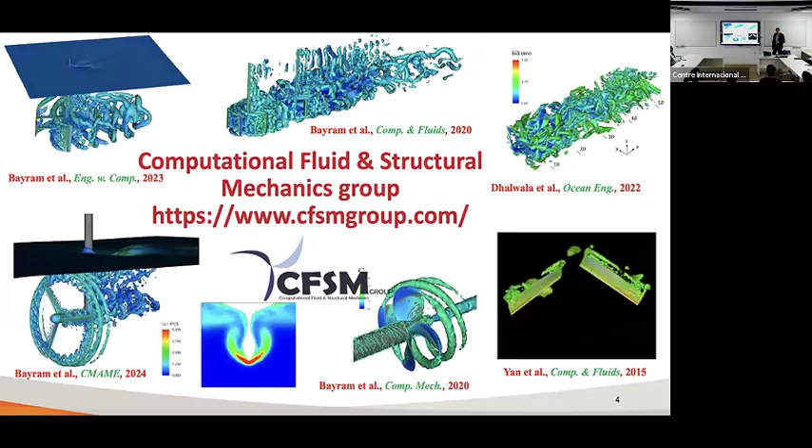And so today I will talk about the left part of the slides, which is kind of highlighted over here. The videos, because there are so many of them, will be a little jaggy, but this is almost exclusively the work related to marine renewable energy systems. So the hydrokinetic turbines, vertical axis, horizontal axis, all the way from single-phase to multi-phase cavitating flow. So I will show you some very recent work we've done in that respect, and highlight a few challenges and the ongoing perspective directions. Okay.

A very quick motivation about the work we do. It's both from the civil and the military application. On the civil spectrum, the several hydrokinetic concepts. I probably should have included one from Spain. I believe it's a very active topic because you're surrounded by the water, so it would make more sense. And then the sports applications, like the flying hydrofoils, which have a very cool multiphase problem where it's not just the cavitation, you also have the ventilation, which is the entering air, which is non-condensable fluids, etc.

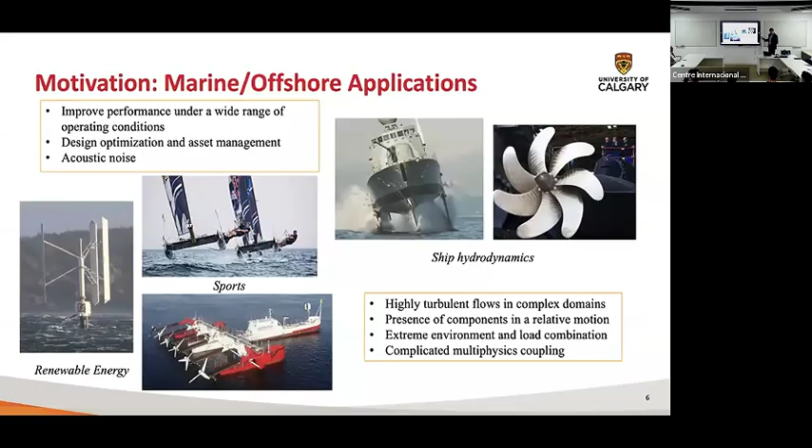And then all the way on the military spectrum, kind of the same things, the flying hydrofoil, but of different types of vehicles, and then the ship propellers and specifically cavitation. We are currently looking only from the fluid mechanics point of view, and you can see all of the challenges just doing fluid mechanics itself: high Reynolds number, multi-physics coupling, computational efficiency, etc. And as you start adding the structural part, for example, if you want to look at the explosion or collapse of your cavity pockets, which will be almost like a blast on your propellers that will completely destroy the surface, that brings another layer of fidelity, and that's something we are looking at right now, but I'm not going to show any of those in this talk.

So there will be lots of equations, and I don't want to apologize because you're all very smart people. So let's talk about what is behind all of these colorful pictures. Otherwise, they're just colorful pictures. So it's a very general form. First of all, as Eugenia mentioned, I am coming from the finite element for fluids community. For this group, I would not call myself a unique person because many of you are working in that realm. So we start with the strong form of the governing equations.

So your classical conservation of linear momentum, conservation of mass, and then you have the transport equation to govern your vapor or volume fraction. You decide which one you want to solve for. And then you also have the free surface, and for the free surface we're using the level set function. So this psi represents the level set. For the multiphase, it's the homogeneous mixture model, the classical equation in terms of the Heaviside function, so nothing exotic.

I will also mention the pros and cons of this homogeneous mixture model approach. Pros, it's very simple and straightforward. Cons, it relies heavily on empiricism, because as you will see in the equations, you need to have the proper rate for the formation of one of the phases. So you need to somehow assume a specific cavitation number, which I don't want to do, because in reality, give me a system and I model it, and it will give me whatever it should. So this is where we've done this. It works. But what I'm looking for right now is something like Cahn-Hilliard type equations, where you can actually solve for the cavitation without assuming any empiricism. We're inspired by the work Hector Gomez is doing at Purdue, where they implemented that. So that's the future steps.

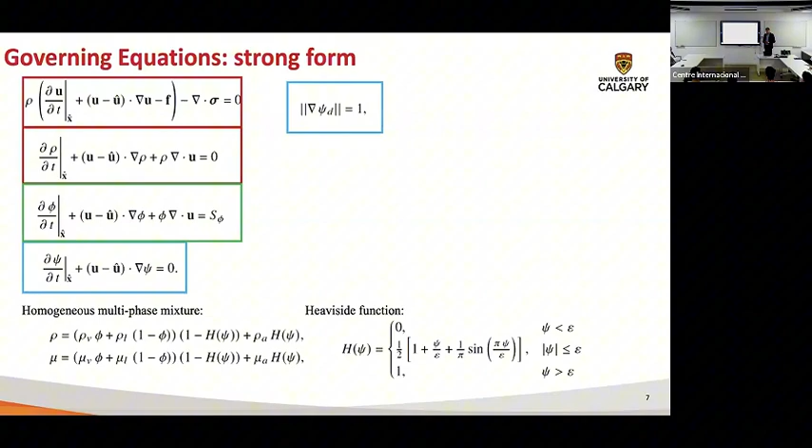And of course, you need to have this Eikonal equation to make sure that you're solving for these distance functions. Then we try to massage the equations a little bit to make them more programmable. So we put all of the unknowns on the right side for the continuity equations. We rearrange the terms in the advection-diffusion equations. And now you see on the right-hand side of this transport equation, you have this S phi. That's your source term, which corresponds to the specific cavitation model that you are using. And I will explain what we do.

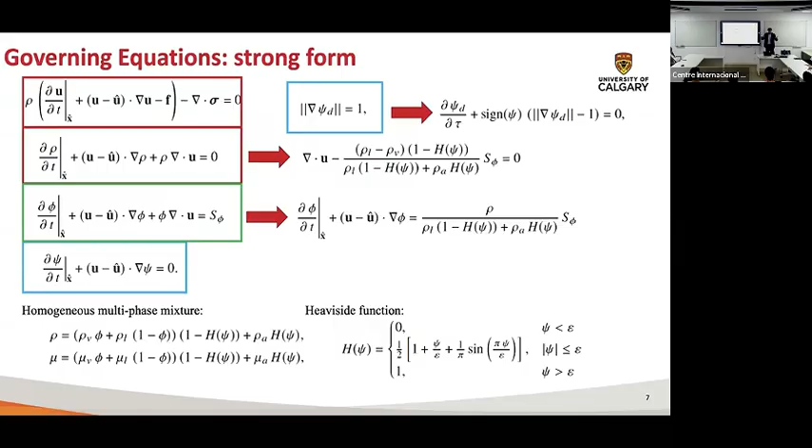The way we solve the Eikonal equation is we formulated it in the advective form using this pseudo time step approach. That's something that Yuri Bazilevs and Ido Akkerman did many years ago, and many researchers first introduced that approach, and we successfully adopted it.

Now, for the cavitation. As I mentioned, we're using this transport equation-based cavitation model. If you are in the area, you know that there are two most commonly used ones. One is called the Merkle model. This is the model where you express your source term as some kind of linearity which is proportional to your local static pressure.

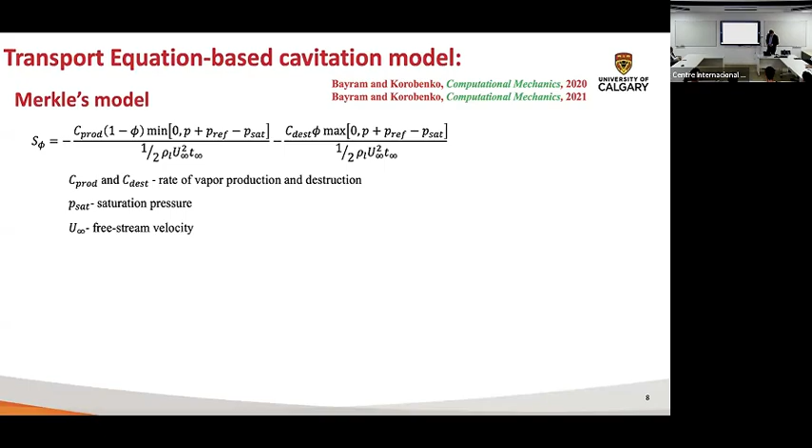And again, this is the empiricism that I'm talking about. You have this rate of production, rate of destruction, which is then related to the cavitation number. And then the second one is the Zwart model, which is kind of a simplification of your Rayleigh-Plesset equation. So it's based on single bubble dynamics, even though in all of these homogeneous mixture models we are not resolving individual bubbles. You're modeling the field.

You may think the most appropriate application would be cloud cavitation, because even in cavitation there are different regimes: individual bubble, cloud cavitation, tip cavitation, etc. So some of the models might work best for one or another. And this is the expression. Again, we did not invent this model. We just successfully adopted it in our finite element formulation.

The very challenging task was to actually linearize this, because you have a square root, so how do you do that? We did some approximation. It's in the paper, so if you're interested, please go ahead. And we performed a sensitivity test of different linearization strategies, because if you linearize everything, you have all of these fancy Euler-Jacobian matrices, but some of them are actually not important. You can skip them.

For example, your transport equation depends on the pressure. Can you ignore that? You can, but that will affect your rate of convergence, maybe affecting stability. So we did a very meticulous test and showed which linearization schemes work best in that respect.

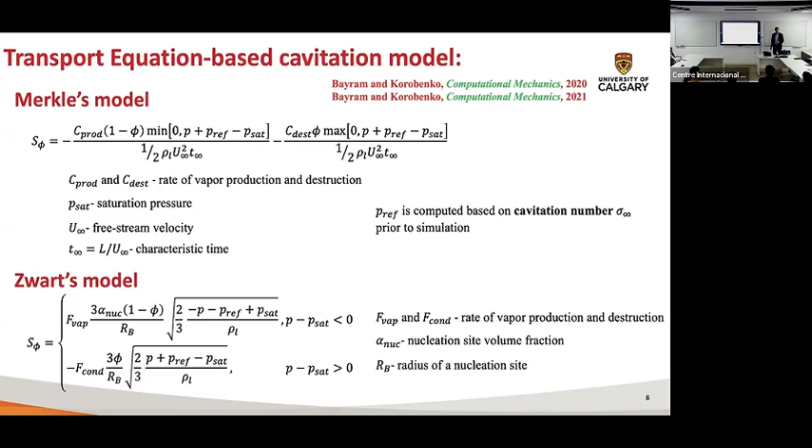And again, this is the level of empiricism, because you need to know this rate of vapor production and destruction. You need to assume a specific nuclei diameter and radius, etc. It works, but I don't like that level of empiricism. And this is your reference pressure. You need to know the cavitation number. The lower the cavitation number, the higher the cavitation you have. So that's the physics of cavitation at the level I want to present it here.

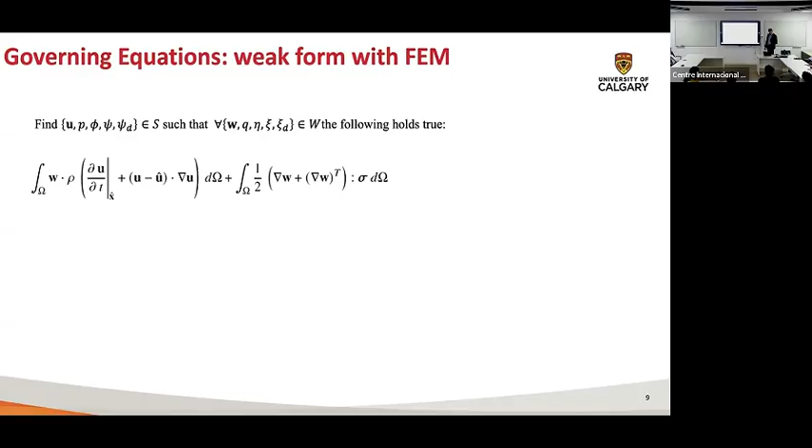Good. So hopefully you still remember that set of governing equations, the strong form, your partial differential equations. Now let's formulate the weak form of the problem using variational calculus. It's nothing but the integral form of the equation. This is your classical Galerkin, corresponding to the momentum, the continuity, the transport equation for the vapor volume fraction, and then your body term corresponding to the momentum equation. Then the same integral form for the level set, and the same weak form for the distance functions. So this is your standard classical Galerkin finite element approach.

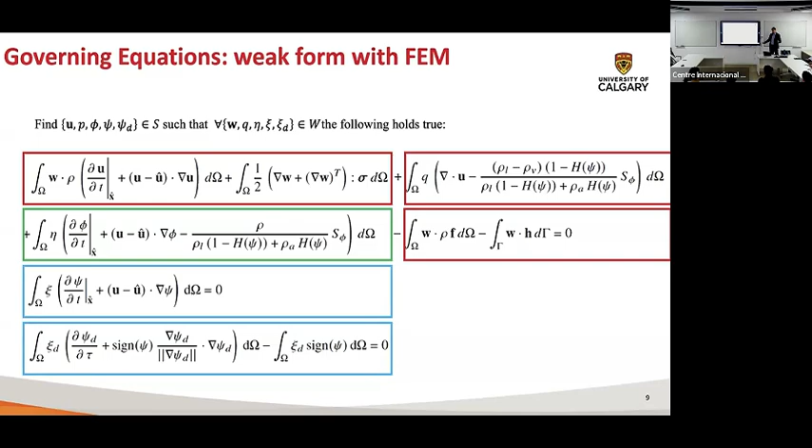Good, but unstable. In the presence of source terms, in advection-dominated regimes, it falls apart. So you need to do something smarter. This is where we work with the stabilized finite element method, more specifically the variational multiscale formulation. I will give you a very quick intro to the VMS method, which I assume many of you are familiar with.

How many of you heard about VMS or are using VMS? How many of you know LES? How many of you are structural mechanics people? How many of you heard about turbulence? Excellent. Let's start with that.

Turbulence. You can describe turbulence using this energy cascade plot. You plot the energy versus the wave number. Larger eddies, smaller frequency, more energy-containing scales, and as these vortices propagate, they break apart. This is your energy cascade. Energy is transferred from the large scales to the small, and they dissipate at the Kolmogorov scales. This is your viscous dissipation regime.

Now, a very quick intro to turbulence modeling. There are three main turbulence modeling approaches. One is called RANS, or actually URANS, where you simply model everything. So you are not resolving at all. In URANS, you're only resolving your energetic large scales.

Then the second one is LES, where you assume that your cutoff length is somewhere in the inertial regime, right? So this is the famous -5/3 slope. And then you have DNS, where you're resolving everything, meaning that your mesh is so fine that you're capturing everything. So VMS is an LES-like approach, which means your mesh should be in this inertial regime. So that's the starting point.

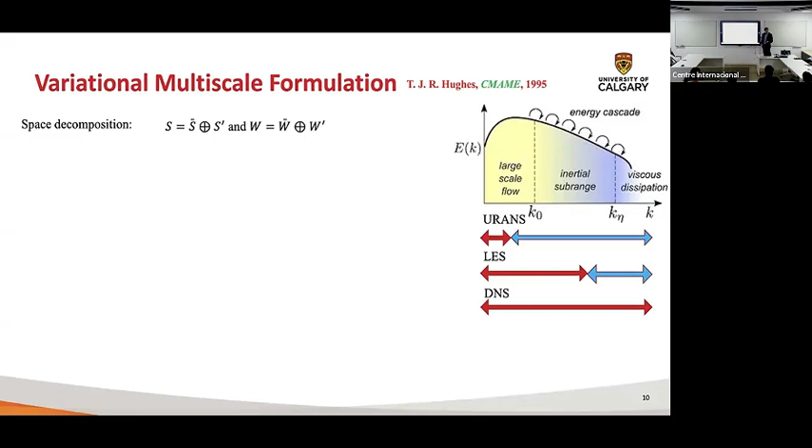And then, classical to LES, you start with this scale separation into the coarse scale, something that you are capturing with your mesh, and the small scale, something that you are modeling. So now you introduce that decomposition into your test function, and you throw in solution variables and put it back into your Galerkin form. What you end up with is two sets of equations, a coarse scale and a fine scale. To close the system, I simply need to solve the fine scale equation for my U prime and throw it back. Can I? Of course I cannot, because it's as difficult as solving the original problem.

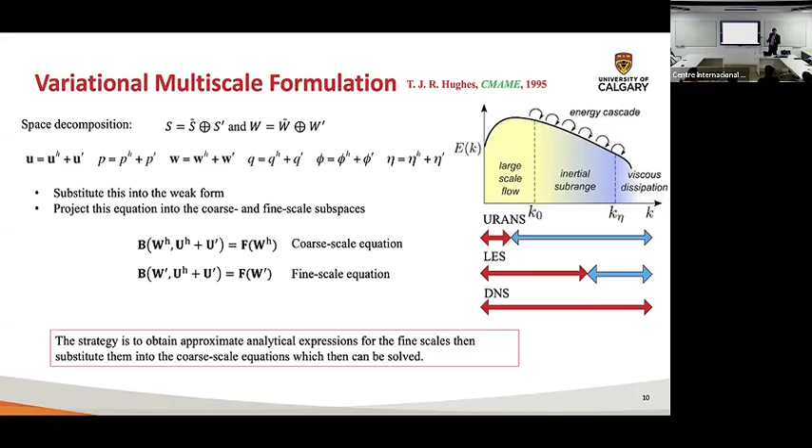So this is where the beautiful mathematics comes into place. We can formulate these problems in terms of Green's functions, and then we solve for the approximate Green's function. Lots of work done by colleagues here, Ramon as well, Antonio, and many people. What I will show is a simple form of that. I will show the fine scale equation in terms of this projection operator. I can rearrange my terms so that all of the large scales are on the right-hand side, and you will see that when I group them, they look like the residual of the large scale problem, for the momentum, for the continuity, for the advection diffusion equation.

And then I have this additional term, these functions, which enforce that my right-hand side is still infinite dimensional, because your fine scale subspace is infinite dimensional. And so then you actually do the truncation. You say, okay, I have my expansion, I truncate all of the higher terms, I keep only the first one. Is it good? Many people are still using just that one. So it's good enough, but I still want to look at what the impact of those higher order terms would be. And so you can formulate this approximate fine scale problem.

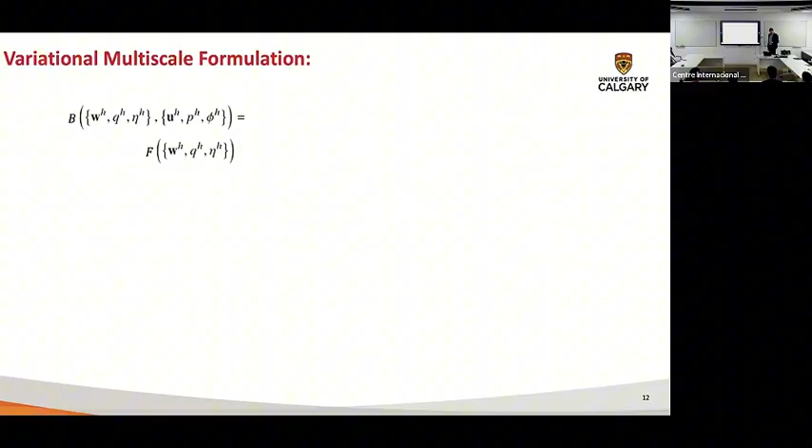So pretty much your small scale is simply proportional to the residuals of the large scale, and your proportionality factor is your stabilization parameter tau, which has this diagonal term, and it was designed to stabilize the formulation in the inertia dominated, advection dominated regime, or when your diffusion term dominates. Look at the work from Tom Hughes and colleagues on the origin of stabilized finite element methods if you want more insight. So now, with all of that explanation about the small scale, you can say I know turbulence, I know the basics of the stabilized finite element method.

So next year I will come and ask how many of you know turbulence and VMS. You should raise your hand, because I remember all of you.

Okay, so let's put all of the terms together and formulate our problem. As before, nothing happened to the Galerkin terms; they're still there. But now you have additional terms. What are those? When you introduce these decompositions, you have an interaction between your large scale and small scale. So you have terms which look like U prime U, U U prime, U prime U prime.

Okay, if you compare it to the classical turbulence modeling, they will look like your cross stress term, Leonard stress term, and the Reynolds-like stress term. I would like to add this Reynolds-like stress term because every time I talk to fluid mechanicians and I say this is the Reynolds stress term, they get hammered, okay, without explaining too much. So I like to add this line.

Okay, so what does it look like numerically? You have your classical streamline SUPG. So this is your cross stress term, U prime. You take the advective part, and you stabilize that one. Then you have this additional PSPG term, pressure stabilized Petrov-Galerkin, to satisfy the Babuška-Brezzi condition, so that we can use equal order interpolation for the velocity and pressure.

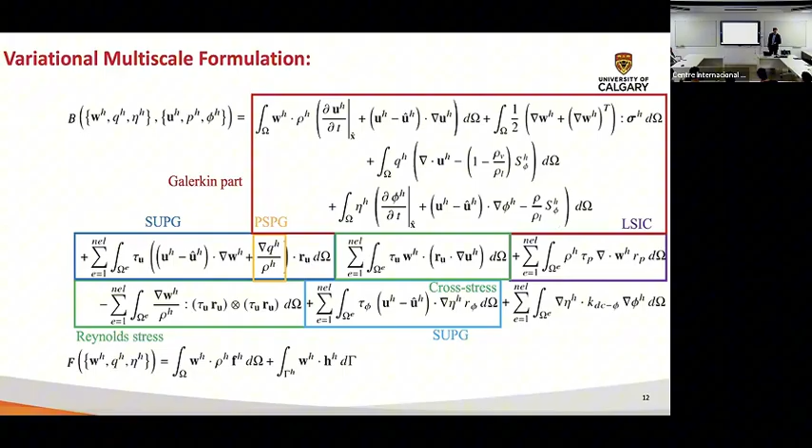Here, again, I don't want to go too much into the details, but for the type of problems we are considering, stabilization itself is not enough, so you need to enforce additional discontinuity capturing. This is the classical gradient-based discontinuity capturing, and we need to do that for the momentum, for the transport equation, and for the level set and redistancing. So that's what you will have.

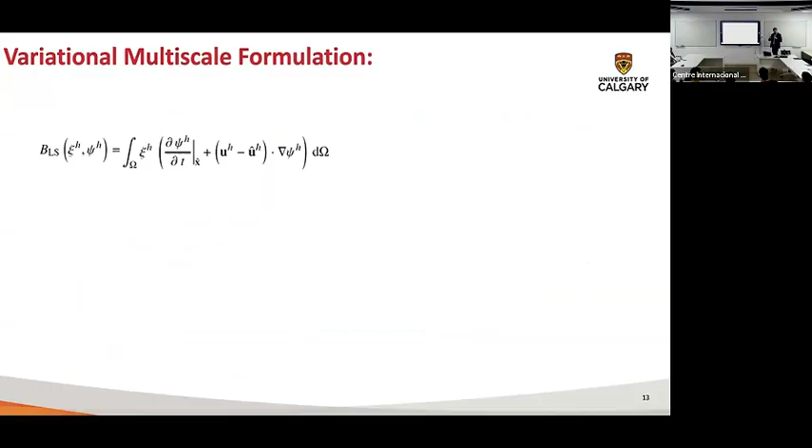So again, I showed you the momentum and the transport equation coupled. We solve them as a coupled problem, and then it is followed by the level set. So this is your VMS formulation for the level set equation: nothing but Galerkin plus SUPG plus discontinuity capturing. And then you do the same thing for the redistancing: your classical Galerkin, SUPG part, plus discontinuity capturing.

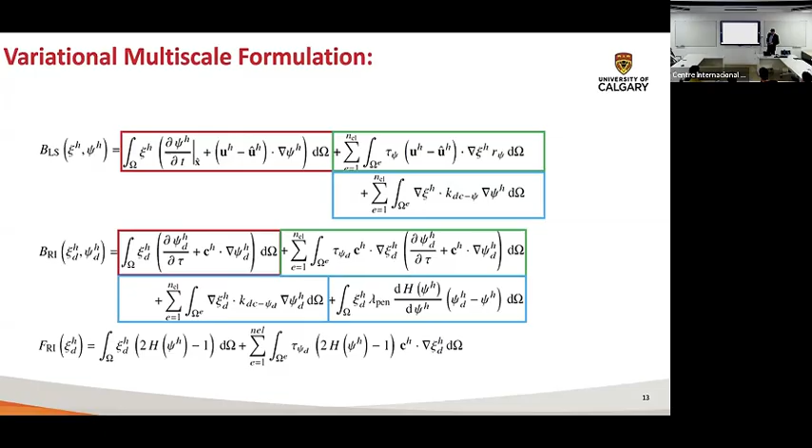Now, for the distance functions, we also realized that when we solve it together with the level set, because we affect that, sometimes we might lose some stability, and so we actually enforce this additional penalty during the redistancing step. And your classical right-hand side. Okay, so those are the equations.

Now, a few more ingredients that we need to implement for the type of problems we will be considering, which is represented here on this schematic view. Think about you have your turbine. It rotates, and the rest of the domain surrounding it is stationary. So we use something called the sliding interface approach: the domain which encompasses the rotor is rotating, the rest of the domain stays stationary.

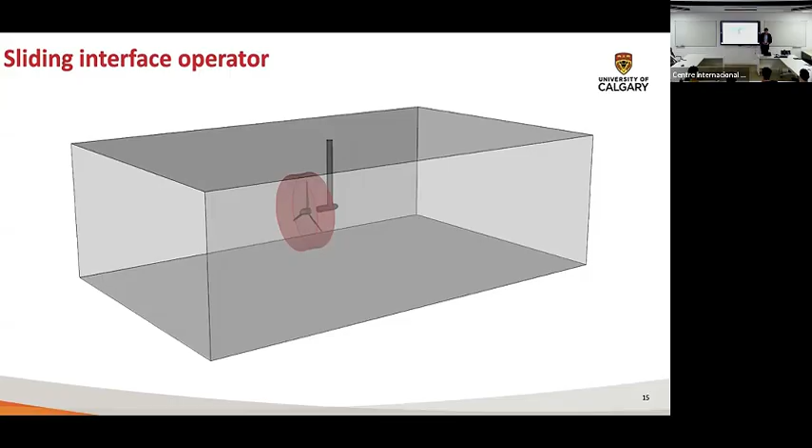What you need to do is enforce your kinematic and traction compatibility on those boundaries, in terms of the fluxes and the other variables. You can think about this sliding interface operator as a discontinuous Galerkin method or Nitsche-like method. So you will have terms which look like consistency, adjoint consistency, and penalty terms. I don't have much time to go into this discussion, but this is how they look. Looks quite messy, but indeed you are enforcing this compatibility.

On the interfaces for the velocity, for the volume vapor fraction, for your level set, and then you need to do the same thing for the distance functions. For the distance functions, if we treat that operator as the advective term, we realized that combination together with the discontinuity capturing doesn't quite work well, because we start seeing instability far from the boundary. We remove discontinuity capturing, it's stabilized everywhere, but we start seeing issues close to the interface. Oh, actually, it's the other way around, because of discontinuity capturing, everywhere.

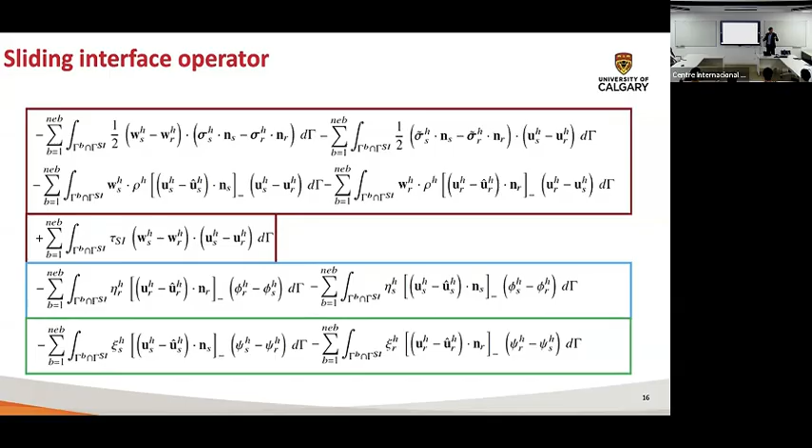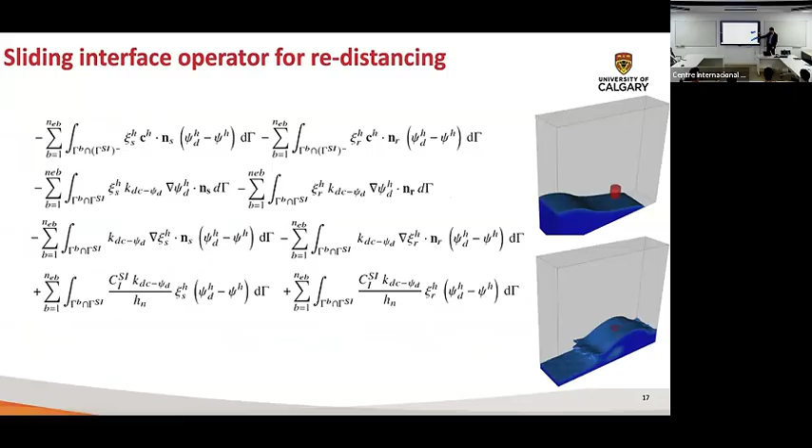So the way we treated that problem is we treated the redistancing as a diffusive term. We added just additional terms, and it actually worked quite well and stabilized. And we tested this on a toy problem. We put a fictitious domain and passed this wave breaking problem through that fictitious domain, and it smoothly went through it without introducing any artificial instabilities whatsoever.

A few more ingredients, because we don't just simply work with the uniform inflow.

We used to do that in the past, and then we realized that everything is turbulent in nature. So we need to somehow impose this turbulent inflow. There are many ways you can do it in practice. You can do this recycling method, right? You can do this fictitious domain or precursor simulation, where you run the precursor and generate your desired statistics. When you reach that, then you feed it into the domain.

We prefer this synthetic turbulence generation method. There are actually three that I'm aware of. STG is one, then there is also SEM, so there are some other synthetic methods, just in the way you enforce this randomness. But the idea behind this synthetic turbulence generation is also given in this paper. It's based on the idea introduced by Shur in 2014.

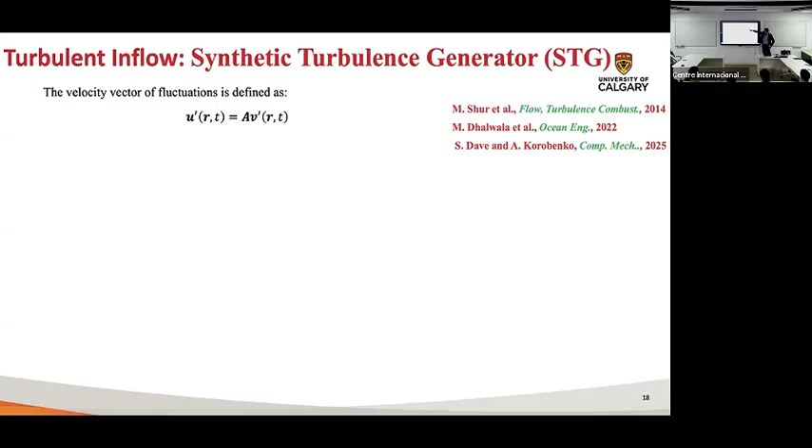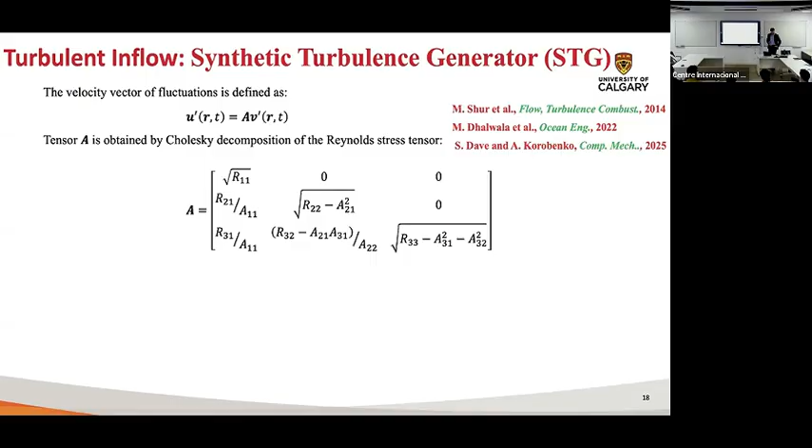So you want to represent this fluctuating velocity vector, right? You rewrite it in terms of this matrix A, and then you do the Cholesky decomposition in terms of the Reynolds stresses. Then, by assigning different random parameters, you try to mimic the Reynolds stresses that you would see in the flow. What you can actually do is take your turbulent intensity, 5%, 10%, etc., relate that to your Reynolds stresses or your turbulent kinetic energy, and you get what you want.

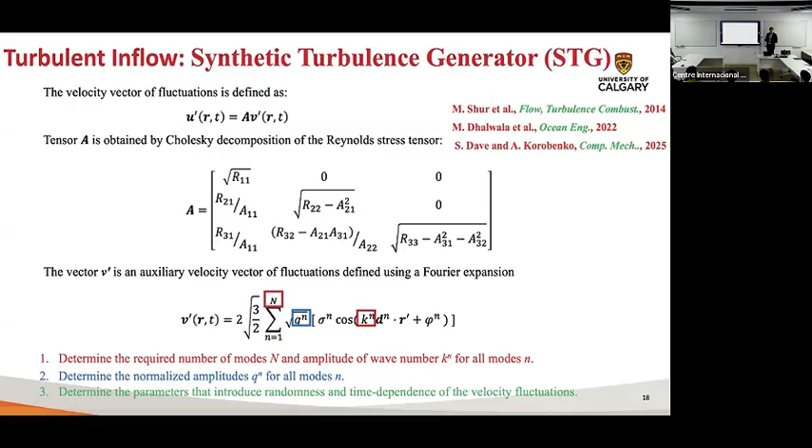So pretty standard methods, nothing exotic, but the unique thing is that it was the first time STG was implemented in the stabilized finite element, and we implemented it into isogeometric analysis, because we're also doing IGA for fluids. So it's not just finite elements, we're also using NURBS or B-splines to model the fluids. Why? Higher order continuity is always great, but then the bandwidth increases drastically. So IGA is still good, but more work has to be done to make it commercially viable.

Okay. Good. Finally, now let's go to the applications. Again, I might skip some because I don't want to run too much over time. The first problem is work that we started with a company called New Energy Corporation, a Calgary-based company. They're the world leader in commercial hydrokinetic turbines using the vertical axis concept. The good thing about the vertical axis concept is that it's omnidirectional. It doesn't matter where the flow is coming from, it will rotate.

The bad thing is that when your flow hits your turbine, a wake generates, and then when it rotates, the same blade will hit its own wake in the downstream region. So with the vertical axis turbine, hydro or wind, doesn't matter, your flow is changing from fully attached to fully separated within a single revolution. Okay, good luck modeling that. That really puts a huge challenge on turbulence modeling in general.

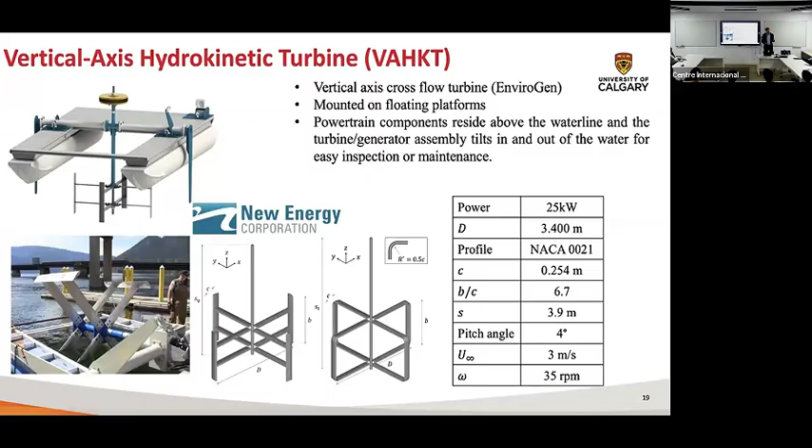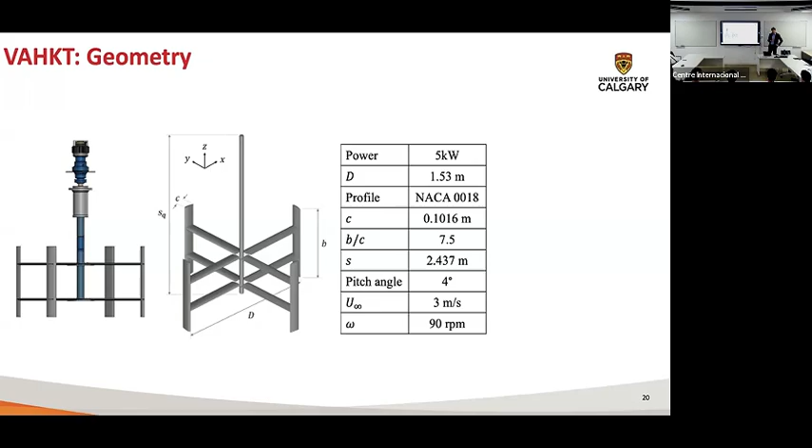So it's pretty cool. But you don't want to simply put that system in the water and make it an artificial reef, right? That already happened. We already have one sitting over there. This is where numerical simulation really comes in as a handy tool to inform your experiments. That's what I see as the impact. We are not replacing experiments. We are informing experiments, and we're creating a dynamic loop where one can inform the other. Experiments can inform numerics as well, right? Why not?

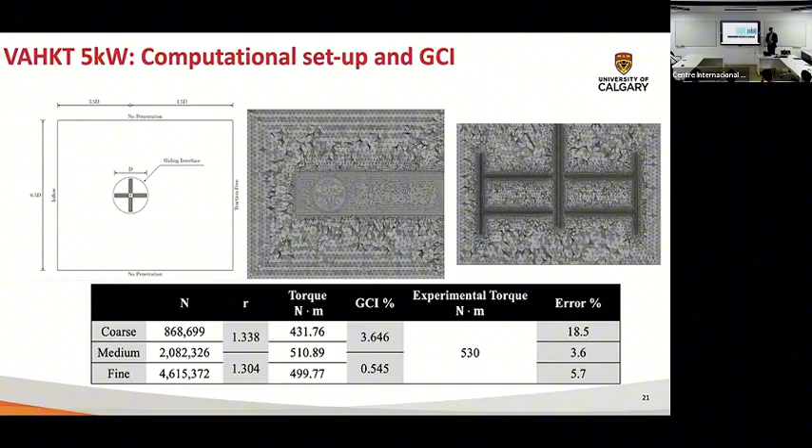Some basic tests, which I can probably skip. Again, when you do CFD, you want to make sure that you first do validation and verification, right? You show the grid convergence, you show that you're agreeing with the experiment. So, this is the work we've done.

We look at the power production, and we look at the wake to make sure that, as we refine, there is nothing. You see actually that the wake is non-symmetric, and that's because of the rotation. So as your turbine rotates, depending on the direction, it will skew the wake in that direction. So it's pretty interesting, which also has an implication on the stability of your free surface,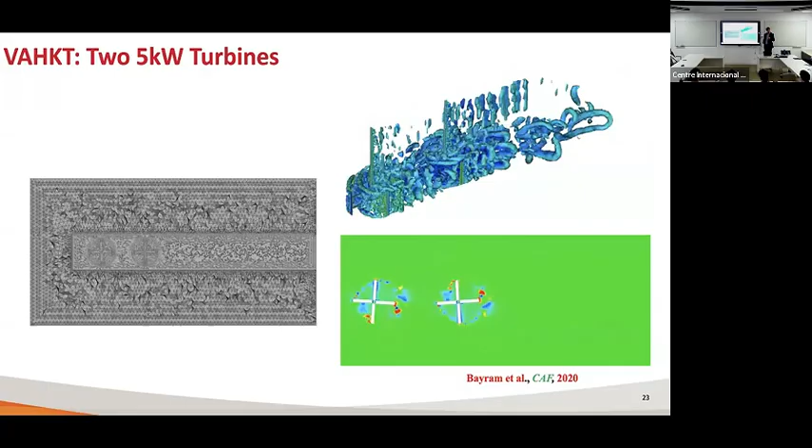But for this test problem, we also did the multi-domain approach. We're like, why do we need to simulate two turbines in the same computational domain? Can we just run a single turbine, collect the data, and then run the second turbine? And so this is the idea behind this multi-domain approach. You run the first turbine, you collect the data at the plane you want to, and then you can play with the distance without actually rerunning anything.

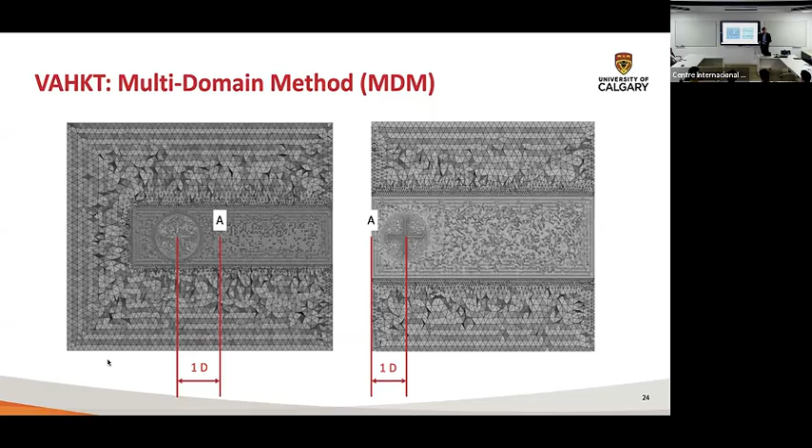So I simply collect the data here, and it will give me a larger distance between the units. So with this multi-domain approach, you can play with the distancing. Now, I should mention that there are two ways you can do that. You can either do interpolation, which is the simplest one, or you can do L2 projection, which is more accurate but slower. We just picked interpolation, and the error was pretty negligible.

So here is the comparison. Actually, the comparison between a single domain and multi-domain I'm not showing. That actually matches quite well. You can check that in the paper. But here we tested the different distance. So what if you put the units 2 diameters versus 4 diameters downstream? Compared to a single turbine, if you put the units 2 diameters apart, you will have a 23% deficit on your second turbine. If you put them 4 diameters, you get 9% deficit.

So now if you think about putting them on the single bar, the distance is pretty minimal. So your second turbine will really suffer and will underperform, which will affect your loading on the generator, fatigue, et cetera. So if you just design your unit as a single system, you screw it pretty much, because you're not accounting for that 23%.

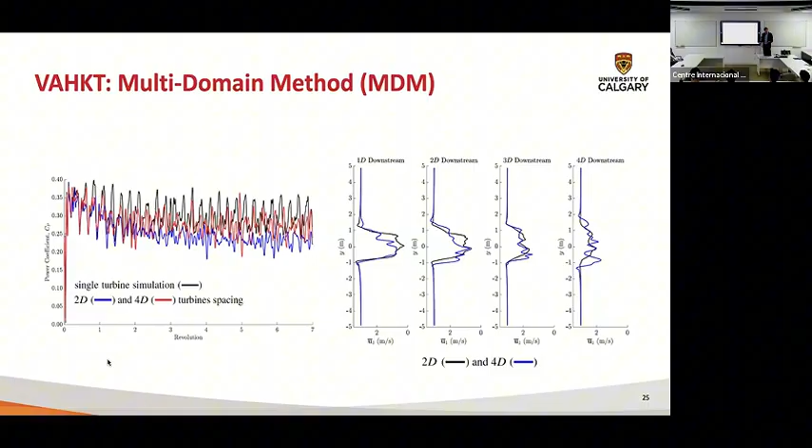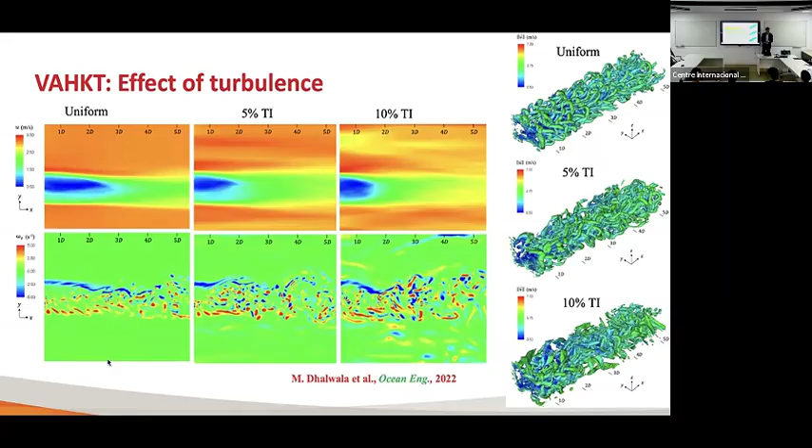I will skip through this one, because we also look at the effect of the turbulence inflow. So we varied the turbulence intensity, like 5%, 10%, and uniform, and we look at the wake recovery. If you increase your turbulent intensity, you increase your mixing, and your wake is recovering faster, which is a good thing, which will allow you to put units closer to each other. So you actually can artificially increase your turbulent intensity by some kind of passive control, some narrow channels or some mixers, etc.

And what we also did, we look at the effect of the immersion. So this was actually a simulation done with a free surface, and we look at something called the deep immersion versus the shallow immersion. And we look at the different struts, so the different geometrical parameters of the turbine: when the struts are located at the quarter span and when they're located at the tip.

Because from the fluid mechanics point of view, when you have this junction, this vortex forming at that junction would pretty much be responsible for the deficit in your power. Because every time you have this blade wake interaction, that drops your performance. So you ideally want to steer those wakes away. And so when you put the struts at the tip, you still have a formation of the tip vortex, but that tip vortex kind of leaves and would not actually interact much with the blade.

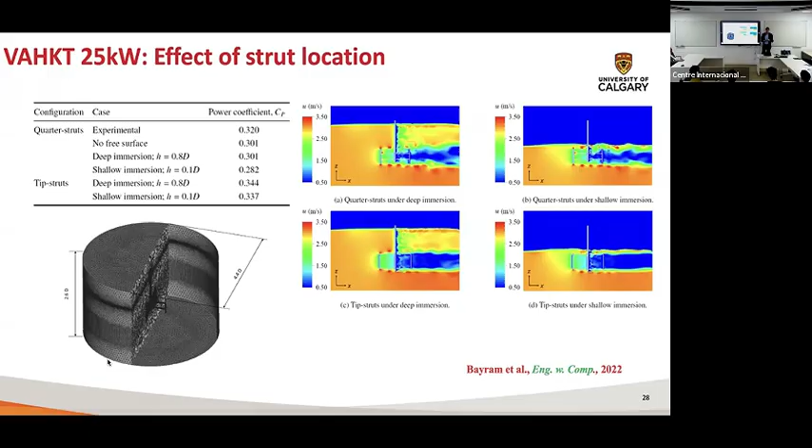However, from the structural point of view, you have a doubly supported beam, so the vibration that you start to encounter on the blade can be significant. So we didn't look at that one, but this is kind of the next step, from the structural point of view, to see what happens.

Again, we also look from the free surface, when you have the shallow immersion versus deep immersion, what happens to the stability of your free surface. So this was just a still water, but we can also impose the different waves using whatever wave spectrum we would like to do, or maybe even some kind of piston generation approach for these waves.

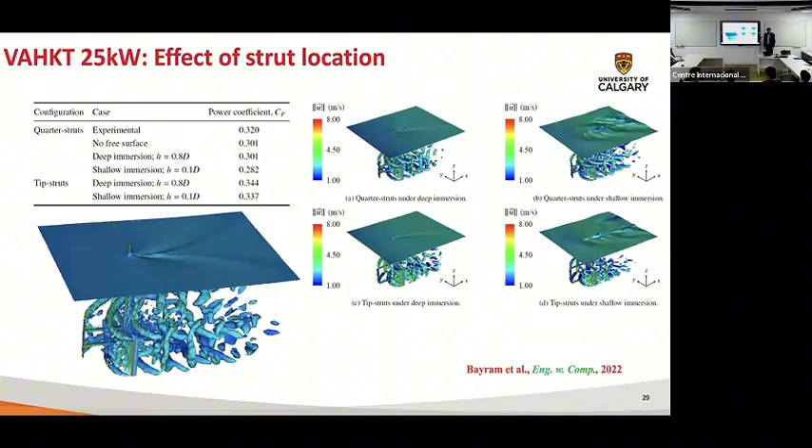A few more interesting studies. Let's see. Okay, 6 minutes. So I put 38. So this will give me a buffer of about 6 minutes, which I can go over.

So far everything was, here's the numerics, believe it, okay, which you should not, okay, be always skeptical. And so what we did, we went to this experimental test. I believe it was in Southampton, if I'm not mistaken. So there are two test cases. One, which is done in the cavitation tunnel, and another one which is done in the open tank, such that you can model the free surface.

The experiment is such a beast that you cannot experimentally model both simultaneously. You could not model cavitation and free surface experimentally, because you would not be able to get that level in the open channel, unless, I don't know, you need to compress the whole room where the open channel is. So we did that separately. We separately validated the cavitation, we separately validated free surface, and then numerically we ran both together and showed what is the impact.

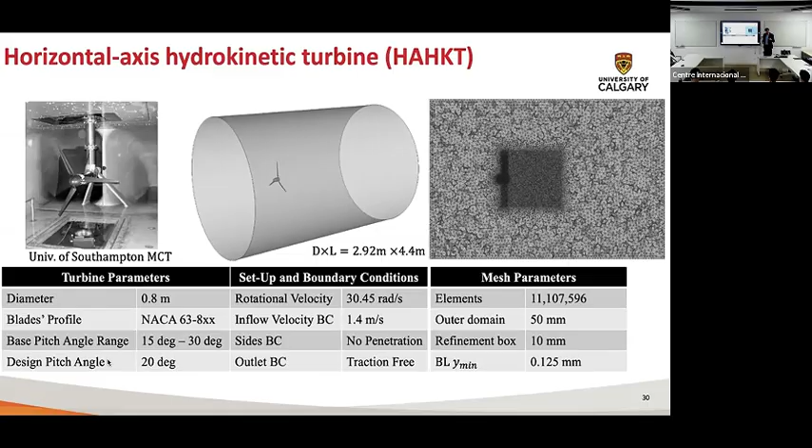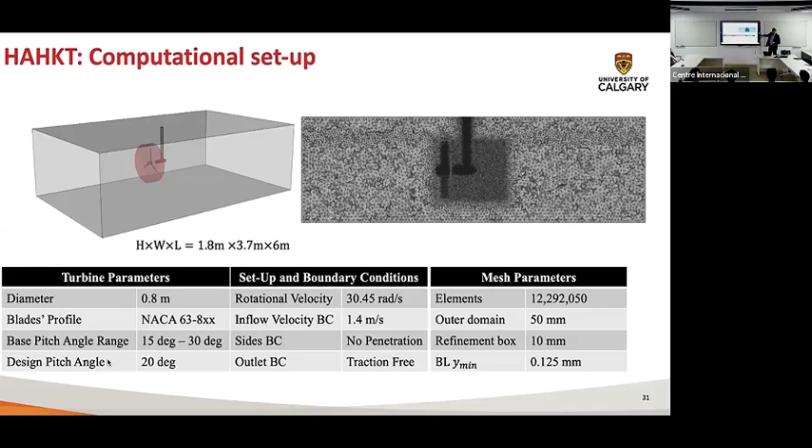So you see all of the characteristics, you see the mesh. Again, for this purpose, we use this multi-domain approach, the sliding interface approach. You actually saw in one of the test studies where we look at the effect of the turbulence, we actually didn't use the sliding interface. It was a single domain which rotated itself. My students were very skeptical, they didn't believe it would work, and it did. I was also quite skeptical, like, can you impose the time-varying boundary conditions on the rotating domain and get everything nice and smooth? And the answer is yes, you can. But here, because the problem is more complex, we use this sliding interface.

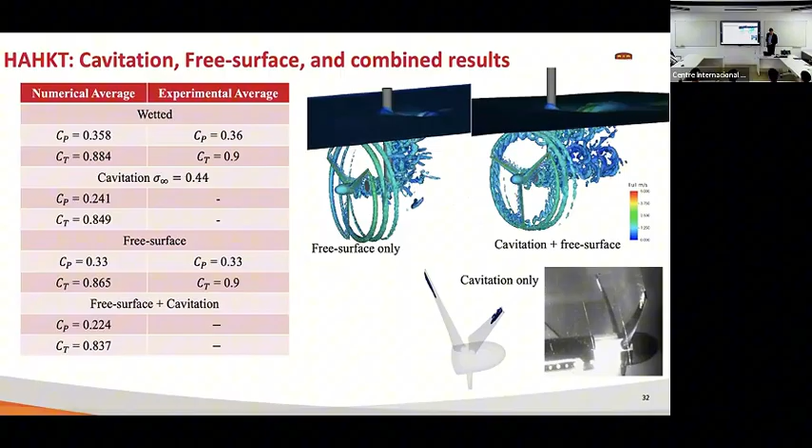And so when you combine them, and this is actually the video playing here. So first of all, when you have the cavity, you see how your flow is changing. You're developing these horseshoe-like vortices, which originate from your tip, right? That also breaks up the downwind interaction. It affects your free surface, etc. And the power deficit that you see when it is coupled is about 37% reduction. So again, pretty significant, not as bad as when you just simply add those two together, but still something that you could not neglect.

Now, something that we've done in the past, but I did not have time to talk about in this study, is we also work on different fluid-structure interaction problems, as well as more classical hydrodynamics problems. That was an early work we've done when I was still at UC San Diego. It's the flapping hydrofoils. It's like a Hobie Cat company where they put this on kayaks, and you paddle, and then you're creating the propulsive force that pushes you forward. It's a flexible hydrofoil, so we mimic the material model to be a rubber-like material, but it also has a stiffener, which has a very specific zigzag pattern. So we accounted for that as well.

Then, on the very large scale, we did an offshore floating horizontal axis wind turbine with the mooring cables. Here, all the structural components are modeled with Kirchhoff-Love shell. Back in the days, Dave Benson and Yuri did the test, and they compared Reissner-Mindlin with Kirchhoff-Love. They showed that Kirchhoff-Love still is applicable for these regimes, even though you're ignoring the through-thickness stresses. The Euler-Bernoulli beam is used here to model the main shaft as well as the mooring cables. And then we have the waves. So the whole system is moving with the waves. It was in the parked condition, so it was not rotating, but we could have also done that.

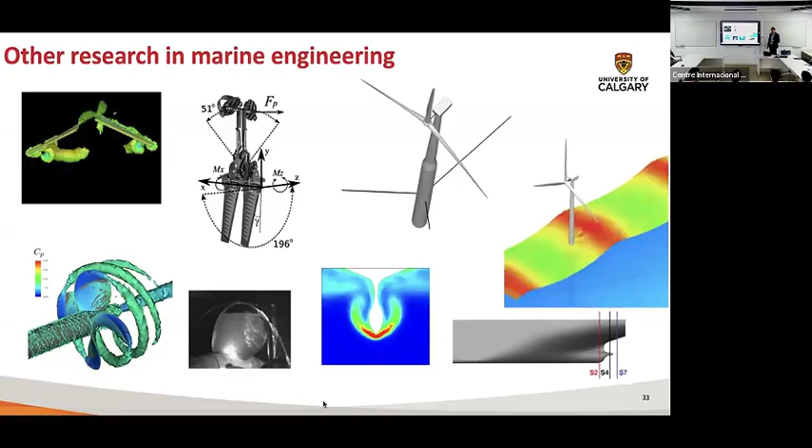And again, some classical hydrodynamics problems on the propeller, looking into the cavitation as well as ship hydrodynamics. So this is the famous JBC, which is the Japan Bulk Carrier. If you go to marine engineering, this is, I believe, a case study they look at quite extensively.

So now, I want to take maybe an extra 3 minutes and show an ongoing work that we are doing. This is similar to the talk I will be giving at the Coupled Problems conference. So far, I showed you CFD at the very high fidelity where we are resolving the surface. It's great, it gives you all of the details, but it's damn slow. It's not practical, period. It takes a lot of time unless you do something smart with your architecture or simulations, whatever, right?

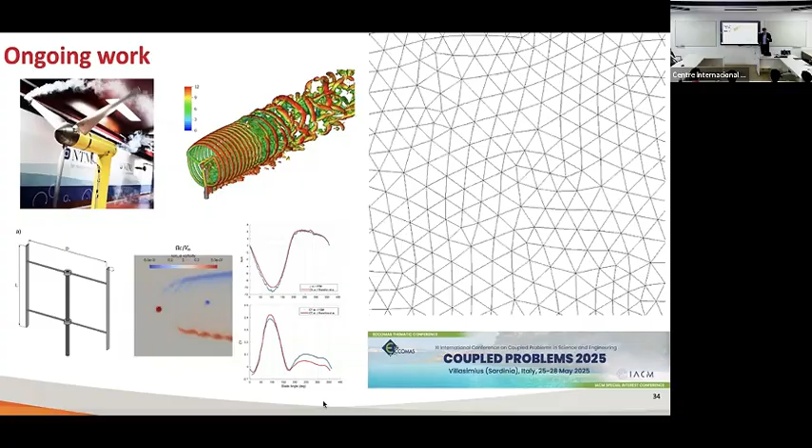So the idea that we adopted from the wind energy community, and we successfully tested for the wind engineering application, which I show over here, is to use something called the actuator line approach. The idea behind that: can I actually represent my airfoil as a point load? The answer is yes, you can. So think about just 2D as an example. This is your blade. You split your blade into different sections. At every section, you know the information about your geometry, you know the chord length, the airfoil type, the lift and drag versus the angle of attack. You use that, and then you collect your forces.

You probably could not see it, but you see where this element is located. I want to use the analogy. This is the lowest fidelity immersed method. Let me put it this way, okay? People in the immersed community probably will kill me, but yeah, kind of like that, right? You have a point which is immersed in the external flow.

So you collect the velocity, and then you use the blade element momentum theory to calculate your aerodynamic forces, okay? And then you take those aerodynamic forces and you put them back on your background grid as the source term in your momentum equation. And because it's just a point, you could not simply put a point load, you need to smear it out, so you project it using some kind of Gaussian distribution function.

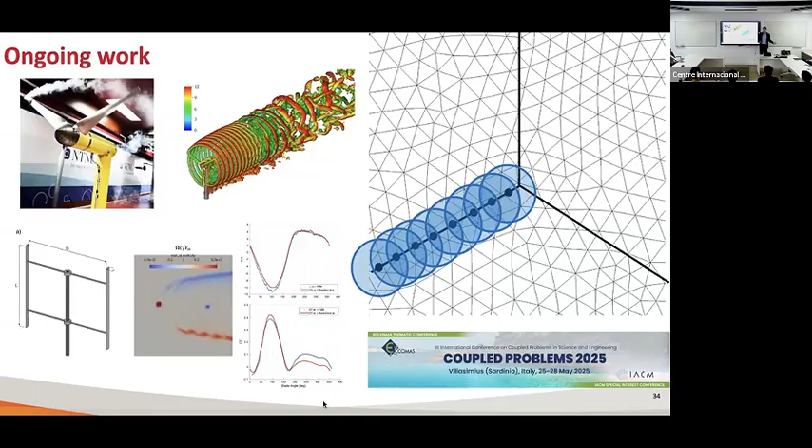And then you repeat that for every point as the turbine rotates, and what you get is exactly this. You correctly represent the wake which is forming with your structure without actually resolving your structure at all. So significant speed up. And just recently we tested this ALM approach for the vertical axis. This is a comparison with some studies, but again, this is very preliminary. We've done this for the air, the same thing we can do for the water, and this is something that we're currently testing.

Now, another thing that we are working on, and this would be another talk I will be giving when I'm back here for the ADMOS, is the reduced order model. There are many people in the room who are working in ROM: classical, POD-based ROM, with your classical quasi-static algebraic subgrid scale model for the FOM. And we're using something called the consistent ROM, which means we incorporated all of the stabilization that we use in FOM. It's well known that your ROM will fail at high Reynolds number. I was always quite skeptical about that.

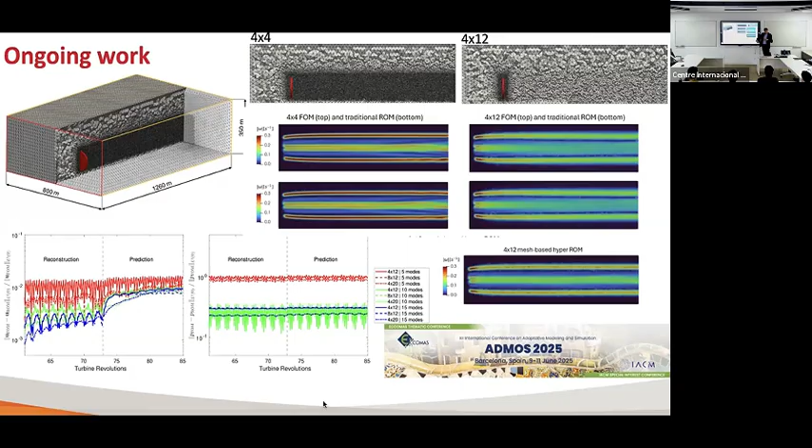Just out of curiosity, we decided to run this problem. So here it's the wind turbine operating at a Reynolds number of order 10 to the power 7. We were able, with the mesh-based hyperreduction, to represent the wake using only 10 modes, and it was stable. And you look at the L2 error for velocity and pressure, it was of order 10 to the -3, 10 to the -2. So the results were pretty impressive. The paper is currently under review in CMAME, but I would be happy to share the data. The same ROM we try to implement for the marine. So that was the last technical slide.